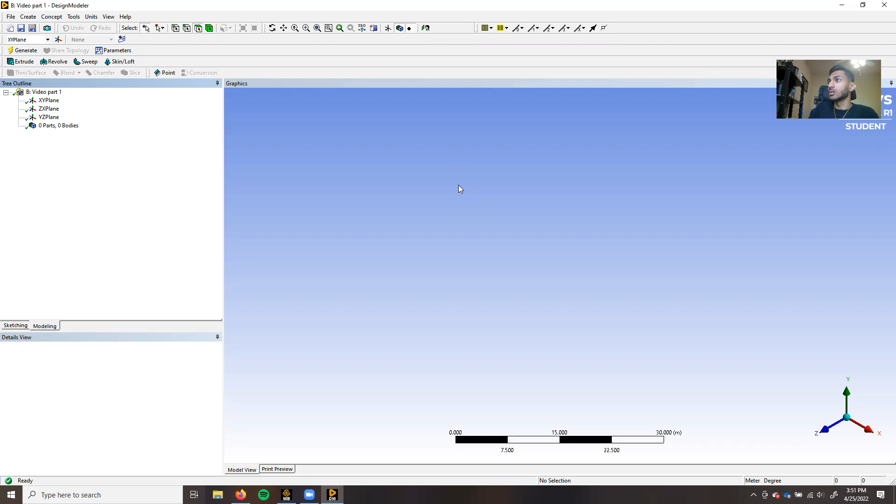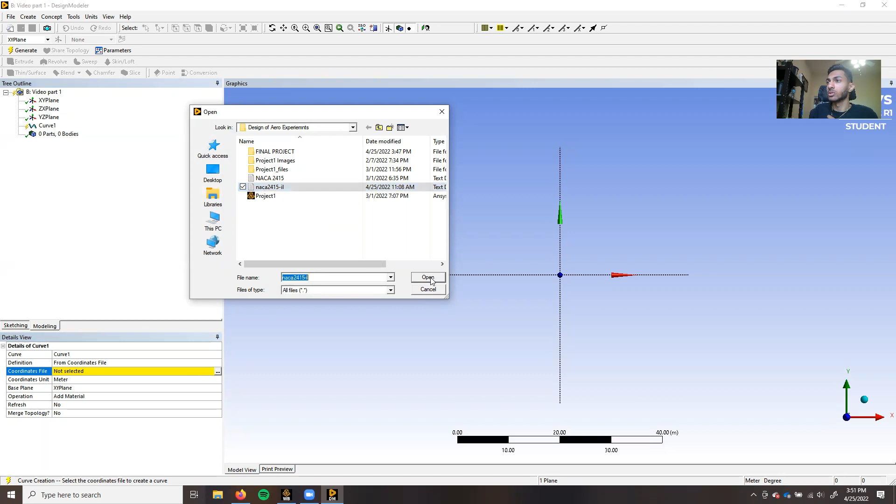Once DesignModeler is open, I'm going to just turn my view like that. Go to Concept, Curve, and then Curve from Coordinate File, and then select the coordinate file. I already have the coordinate file downloaded for the NACA 2415. It's going to be formatted in a certain way, and I've already gone ahead and done that from when I downloaded it. So if I press open, it imports it just like that. And I'll go and generate that so it's there.

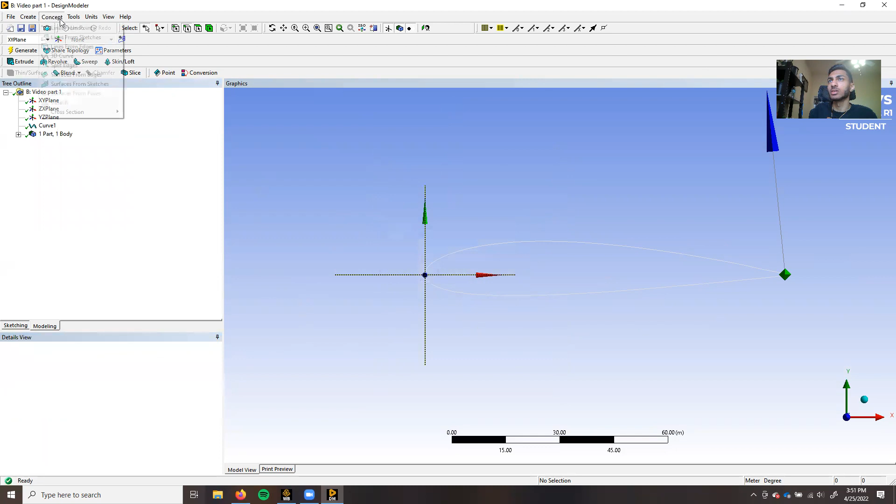Then I'll go to Lines from Edges, and select that edge, apply, and then generate that. So we have lines created. Then we need Surfaces from Edges. This edge, apply, and then we go and generate that. It turns into a surface. So that's how we're going to start there.

Now what I'm going to do is go to the XY plane and create a new sketch. Go into Sketching, Arc by 3 Points, create the arc for this. There. Then modify dimensions, just to make sure this arc is lined up with the origin like that.

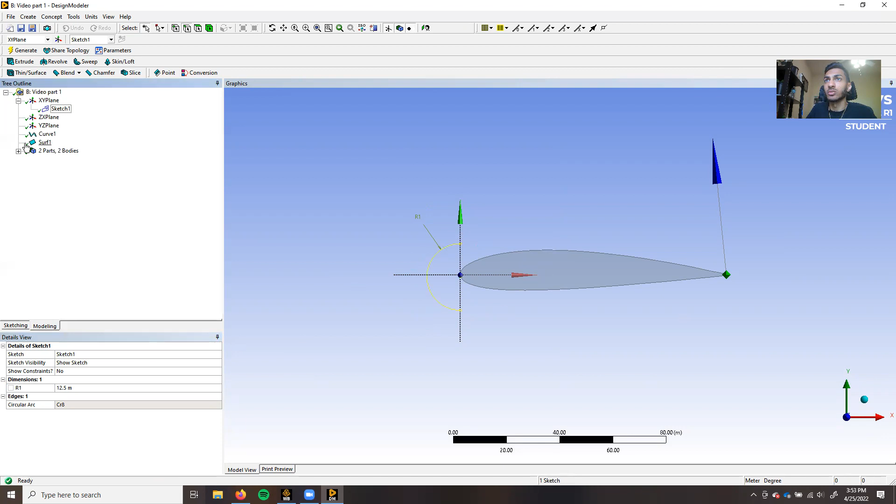And we'll do another one. So draw and, no. Go to General and look at this. We're gonna want this at 4.5. And you'll notice this is actually just not the right size. So to fix that, we'll go back to model and we're going to order this curve here and we can just put meter to centimeter. Again. We want it to be pretty small inside of our enclosure.

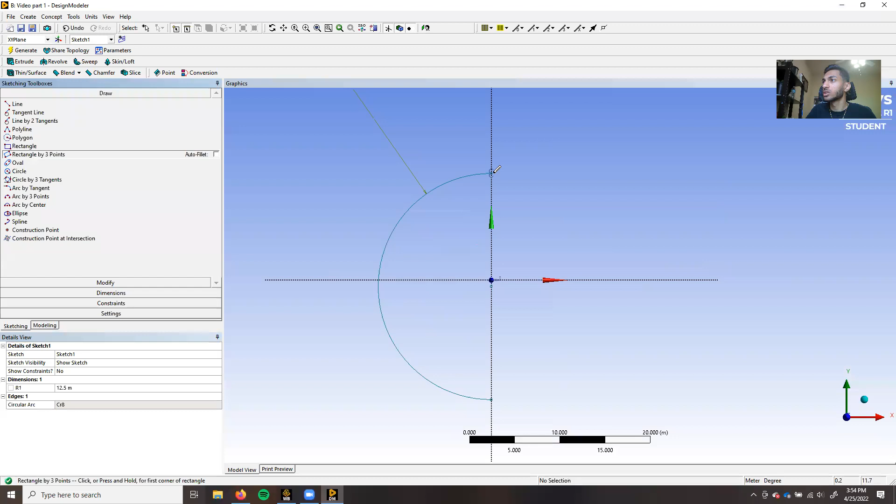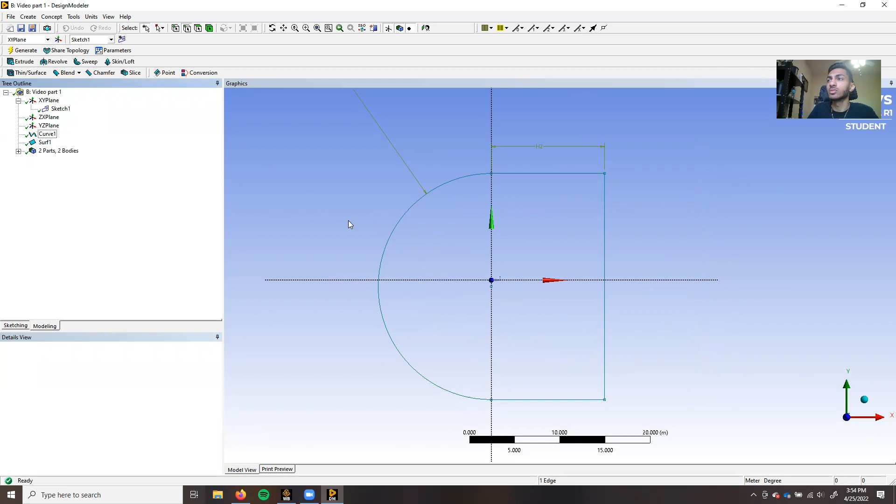Next, we're going to do Rectangle by 3 Points. We're going to make sure we're still working with one rectangle by 3 points. Like that. Dimension, General dimension. And then let's make sure that this is also set. This will be kind of our wind tunnel. It's not actually a wind tunnel, it's just a box. That looks good. Our last step is going to be just to erase this middle line right here. So that looks good. What we're going to do now is bring this sketch. Good.

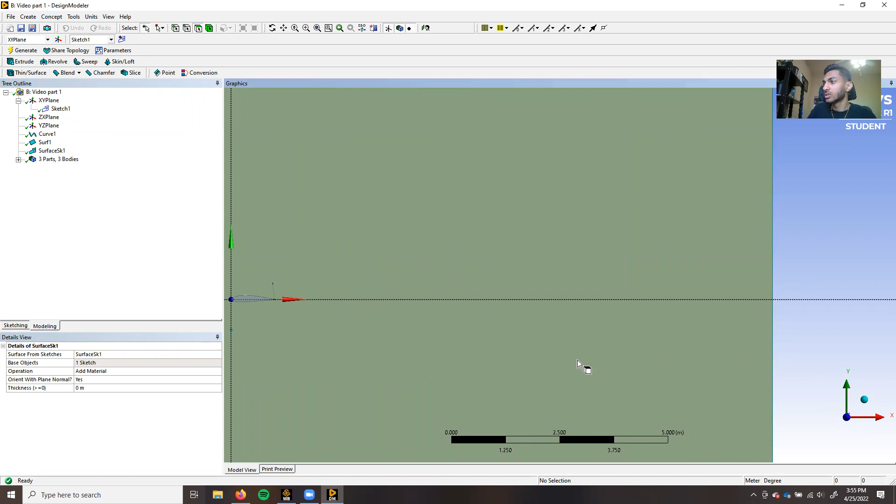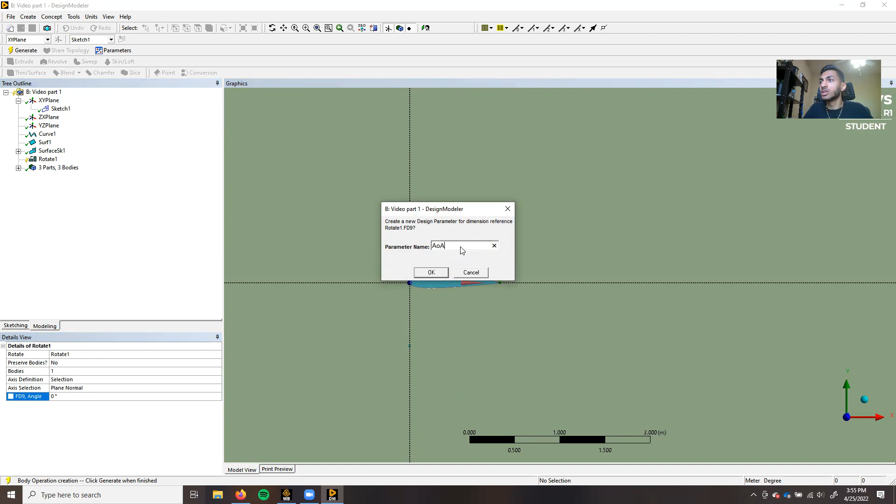And now we just want to cut out this middle part, so let's zoom in so you can see it. I think actually here's a good point to do some transformation. What I'll do is Create, Body Transformation, Rotate. The body we want for this is the surface. Want plane normal. Zero for now, but we do want to do a parameter. The parameter will make it easy to do the calculation at different angles. If I want to do this, the whole part. And we'll do that.

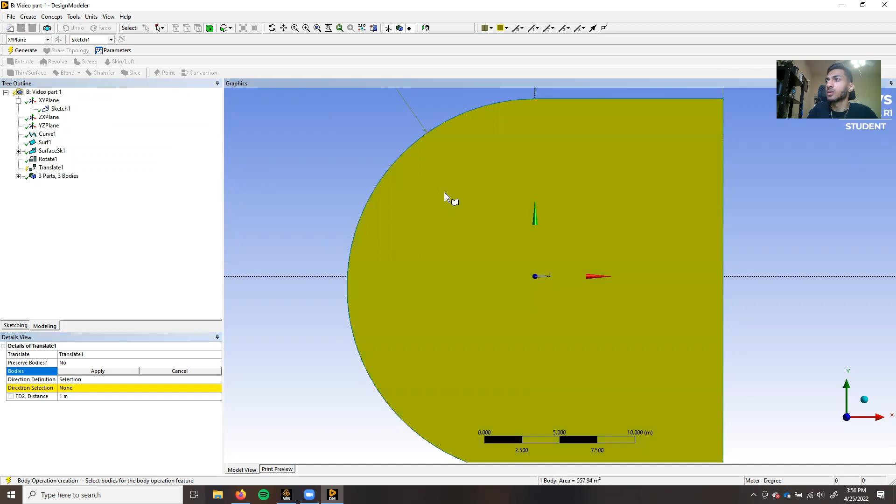We'll go back to Create, Body Transformation. First generate the body transformation. Translate the body in this axis direction. And then we want to move it back one. So that looks great. Again. Back mark. Which is what we want.

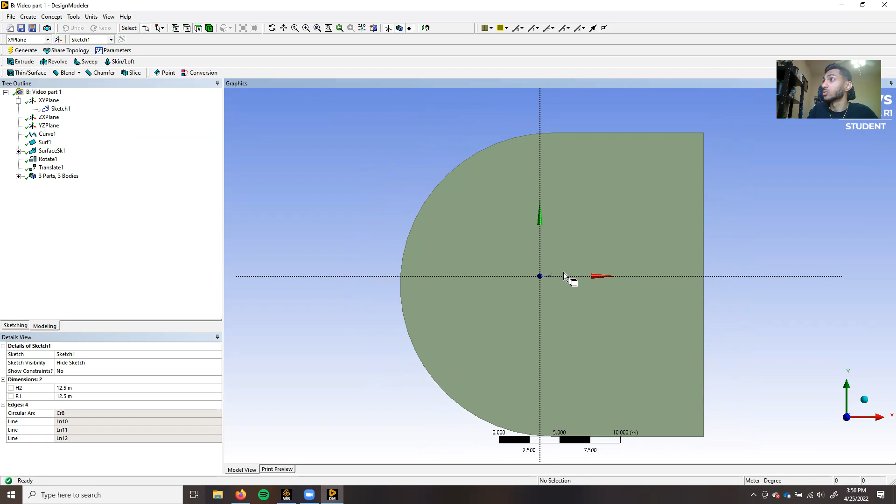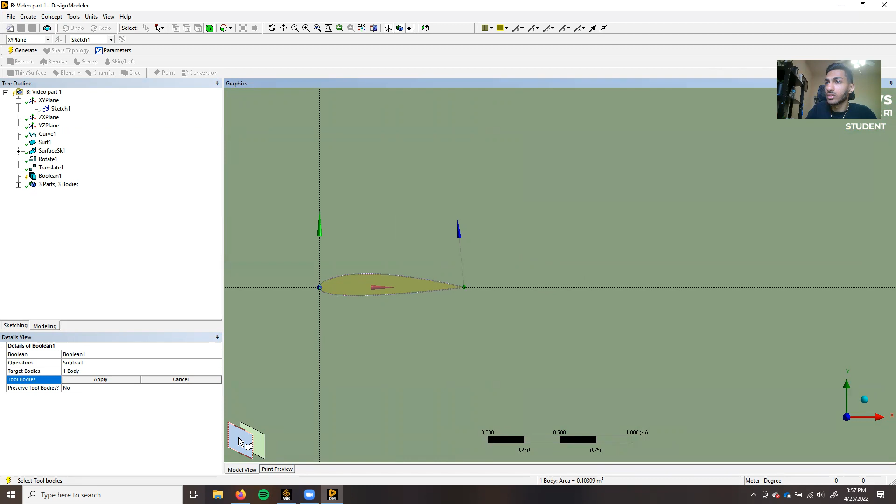All right, so the next thing to do is to take the cutout; we need Boolean. Right, perfect. Target body is this big one, fine. Tool body is going to be the wing, selected by using this in the corner, whatever. Geometry setup, we're good to go. We're going to close this. And using the parameter, marked off by default. I'm going to leave that how it is for now.

Now we're going to go here to mesh. We're going to start editing the mesh. So we'll edit, and we're going to let it open up for us here.

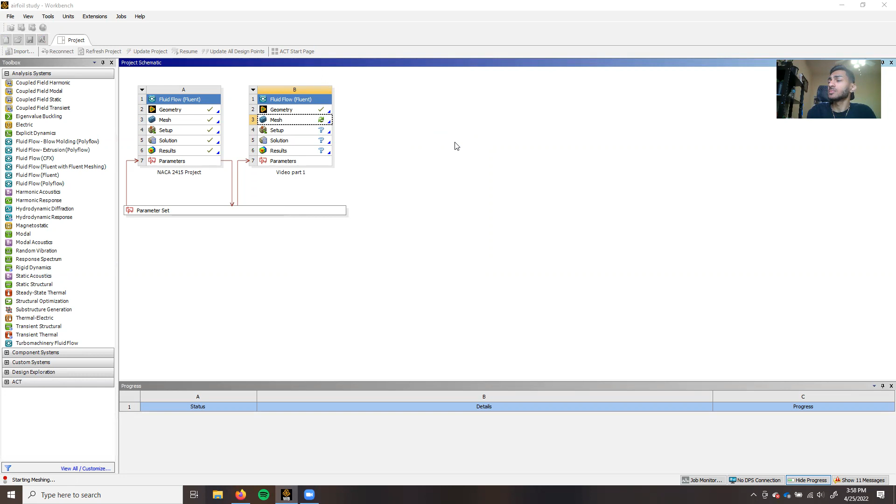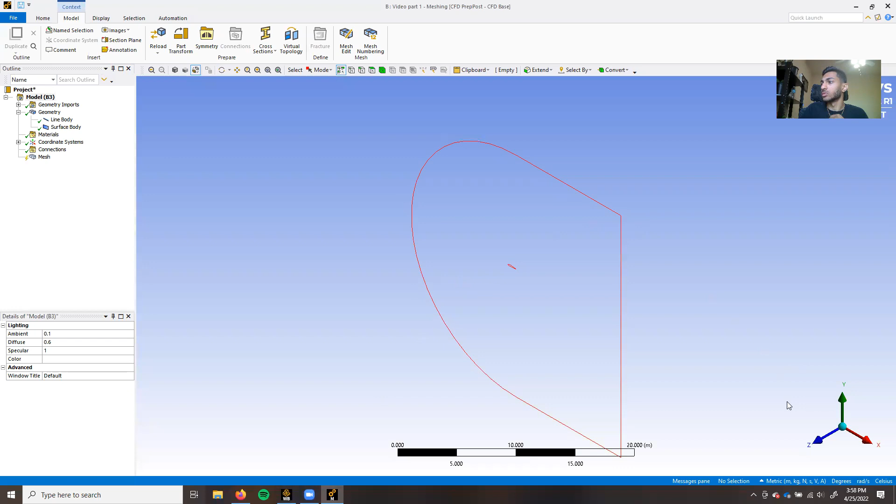Actually, side like this. Go to mesh, insert method, geometry. This one, all triangles. That looks good. Go back here to mesh, insert, go sizing, and for type, we're gonna go

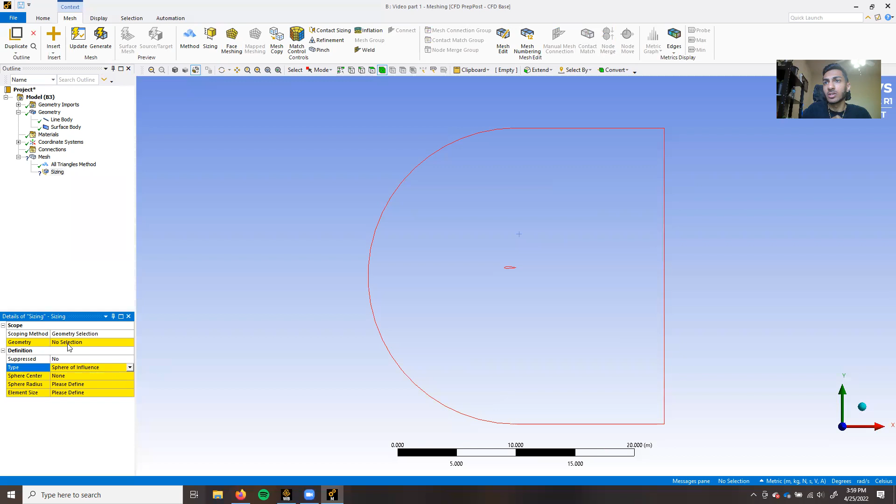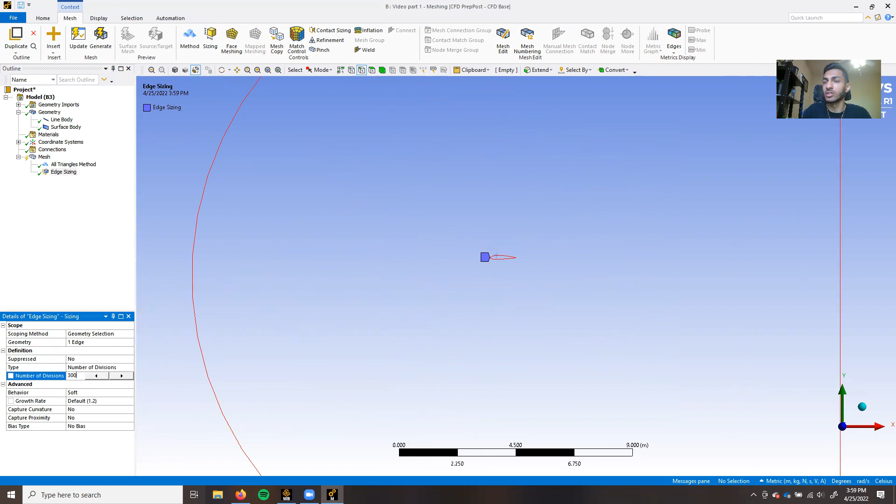divisions and number of divisions. The geometry I want, this edge, select that edge here. All of these edges. Edge. Divisions. I want 300 divisions of bias. Bias here. I'll put a bias factor of 150.

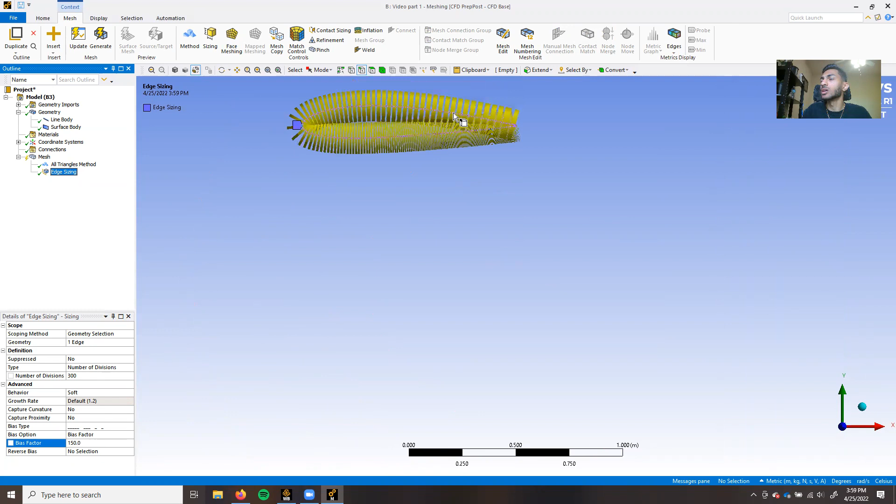This is a lot. Basically makes it so that there's more meshes along surfaces. Insert finally. Now we're here. Looks good for me, so we'll go to mesh and we're gonna

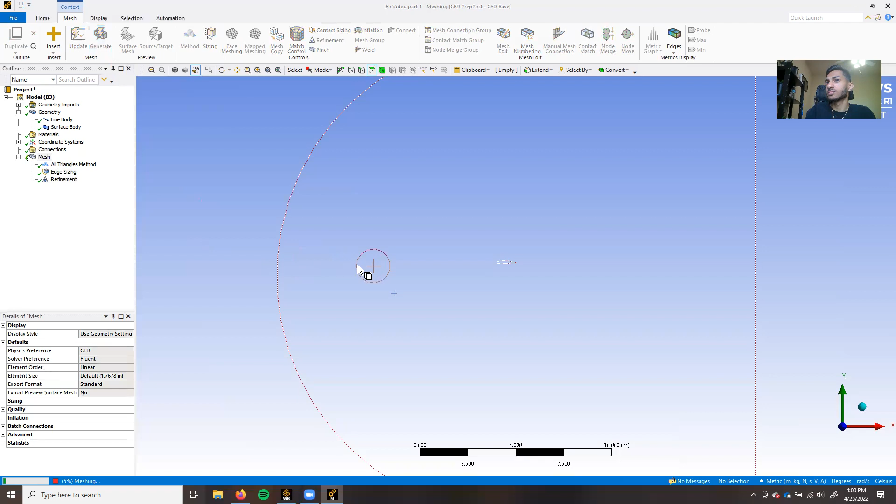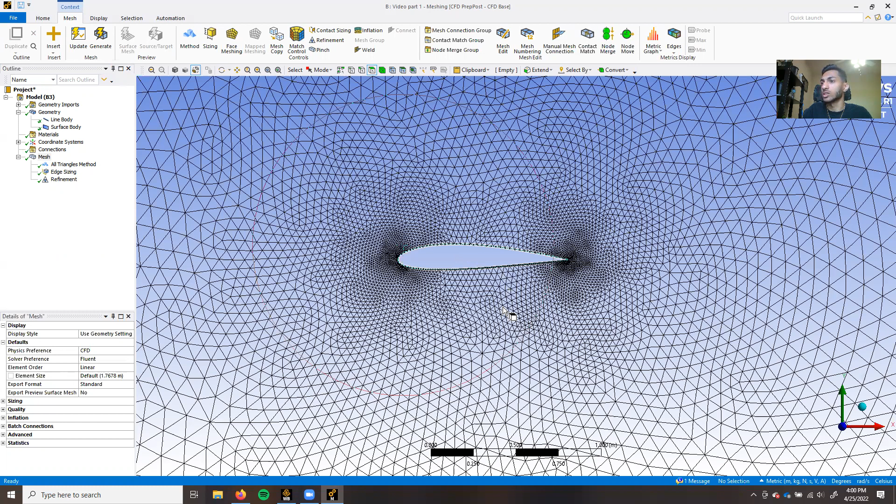Now we'll go to our setup. Double precision, we'll use all this. We'll see the process by which we're calculating everything. Okay, here for us. And let's go over the setup real quickly.

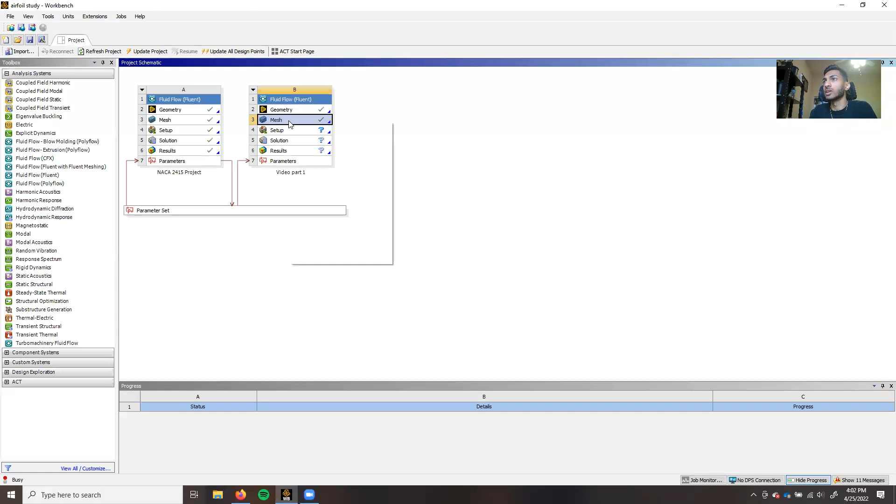Okay, there's something we actually did forget to do, and we'll have to go back to the mesh. I'm going to close out of this. And what we forgot to do was label our named selections. We'll go back here and we'll mesh. We'll do that.

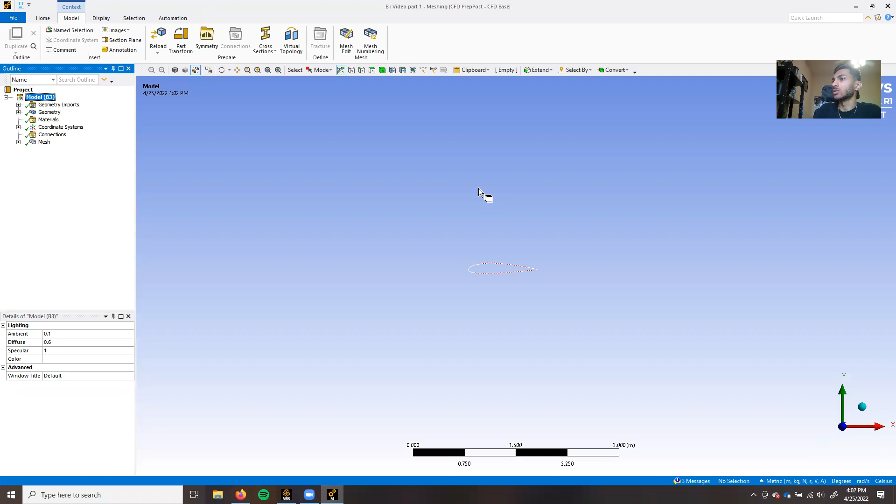Here is the right edge selection. We can select everything. So we go on edge. Click on the button. You can create a named selection for it. This is going to be our inlet. We'll have here. One is your outlet.

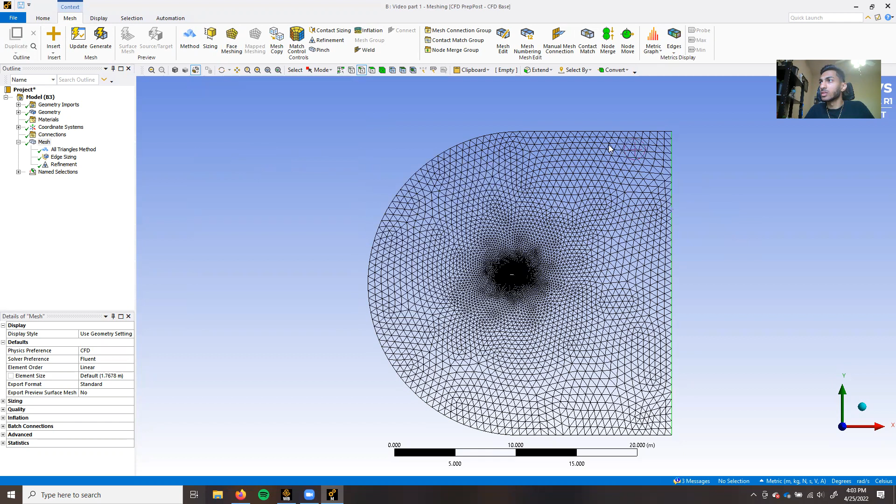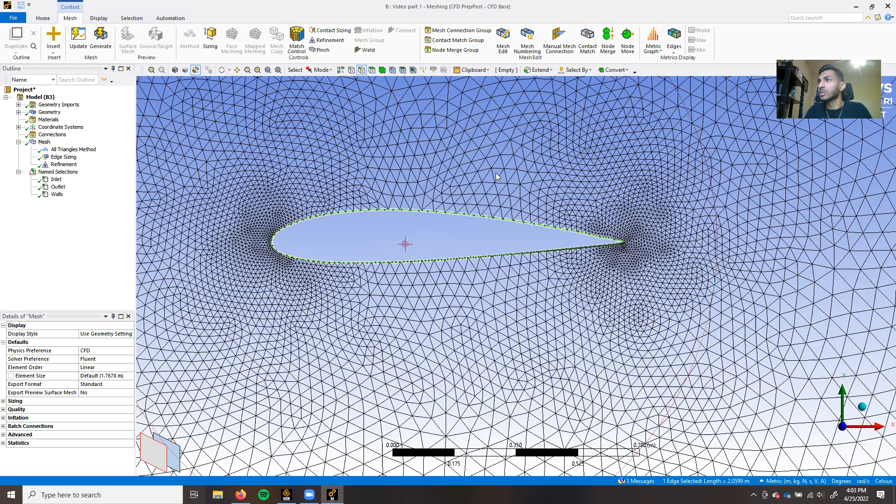And we have this up here and this down here. This thing will be our walls. And then finally, put on your the airfoil and like this. Here. Now that that's done, we can update. Maybe this little message here. Transition successful.

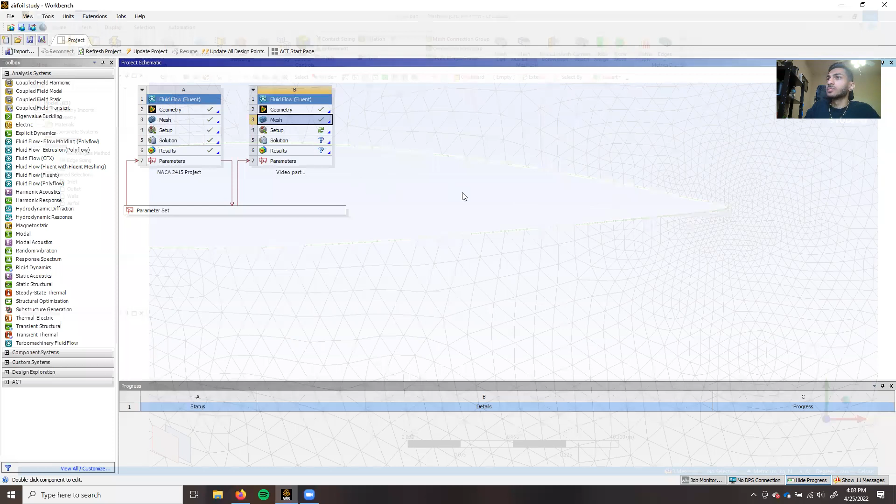Yeah, the next thing we want to do is load the new mesh because the new mesh is what contains all my selections. So everything looks fine in here and press start. Now, hopefully, if we did this right, everything in the setup will actually already be kind of ready to go based on the selections that we created. And this makes it easier for us to set our boundary conditions. Let it load in and we'll take a look.

Zones, that's pretty good. All right, so let's take a look at our boundary conditions now. We have inlet. Look at our inlet here. Open up inlet. And so what I want to do here is set the magnitude to 15. Because that's what the problem says.

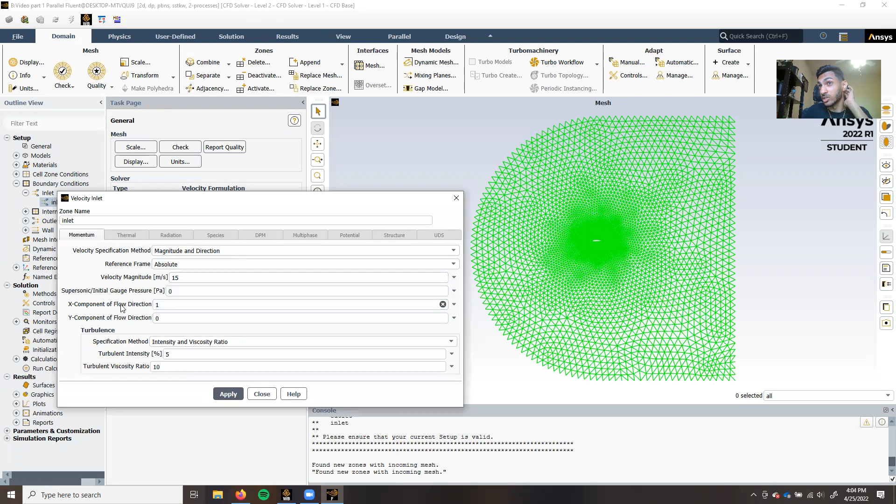And then for normal to boundary, we're going to want it all going in the x direction. So we'll go back into the direction. And just choose the x direction. Like that there. Now we can go to, okay, that looks fine. So what we're going to want to do next is make sure our model here is set to whatever you want it to.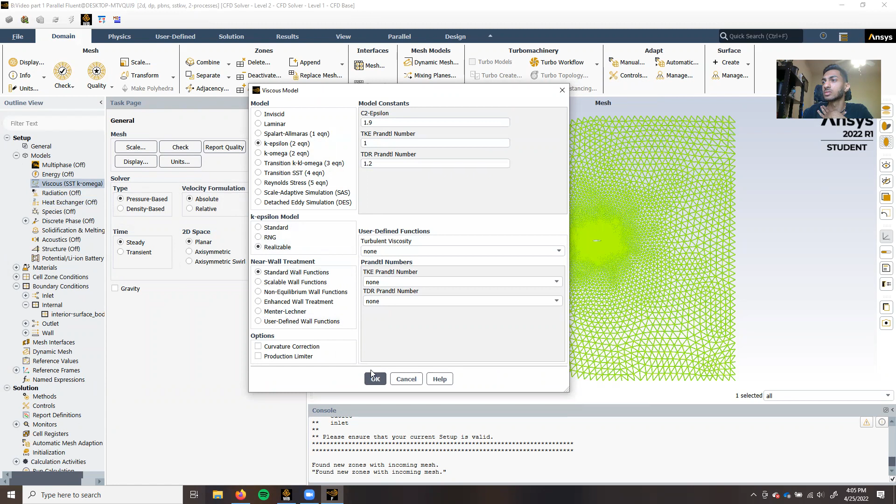We're using viscous, and we're going to use k-epsilon, realizable, and the same. Now, that was based on the tutorial that I want. Then materials, we want fluid, we want air, and just note down the density. Obviously, the density is known, so we'll leave that the same.

Everything here looks fine. Looks fine. Looks good. Looks good. So we'll go down here to initialization now. Standard initialization, computing from the inlet out that way. Everything here is the same. Initial values, everything looks good. Then we can initialize. That's good.

We can go to run calculation now. And we'll set our number of iterations to 100. You can go more or less depending on the computing power of your processor, excuse me, and then we'll go ahead and calculate this and see what we get.

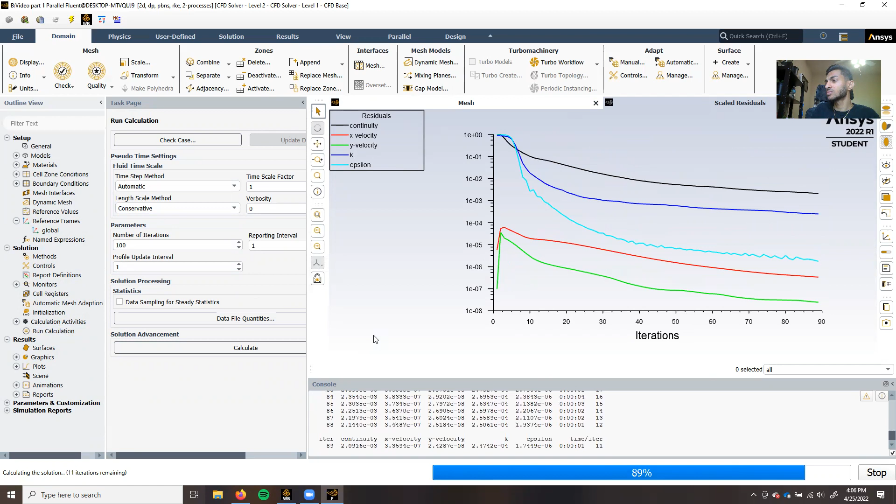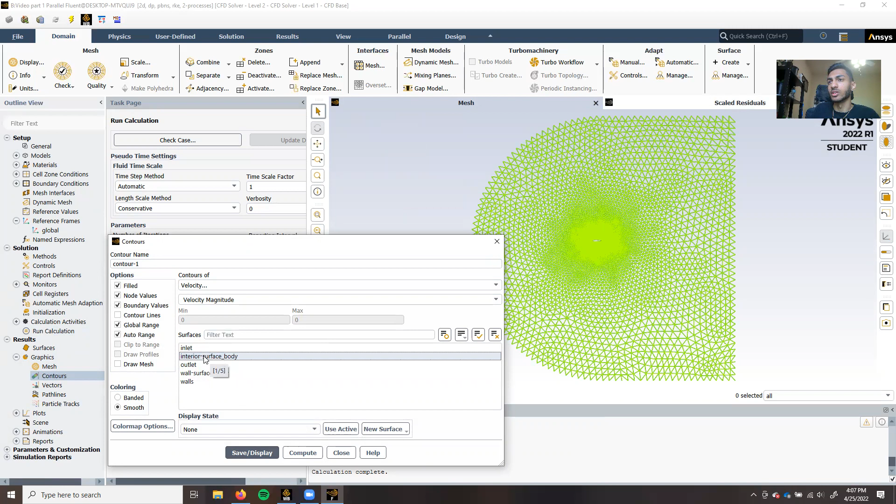Let's take a look at the graphics. We already get some velocity contours. So we'll get velocity contour of interior body surface. Looks good. And we'll get the wall surface body as well. That's the airfoil. And we'll compute and save and display. We'll see what it looks like.

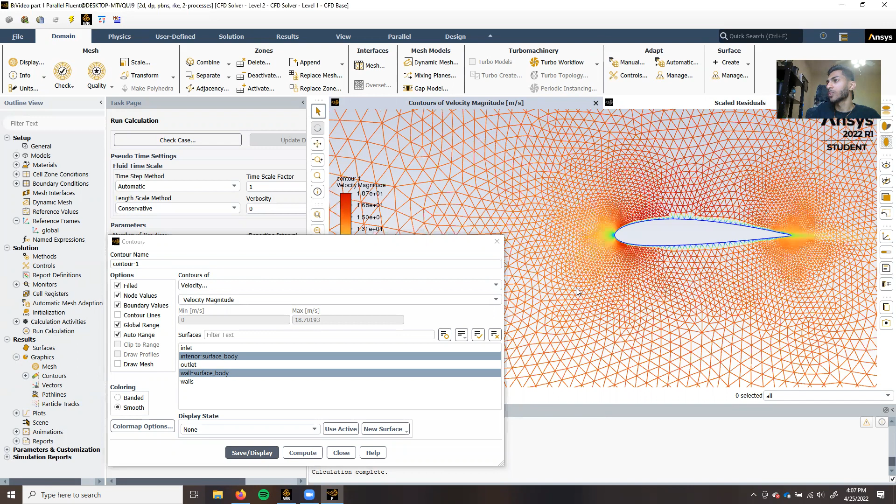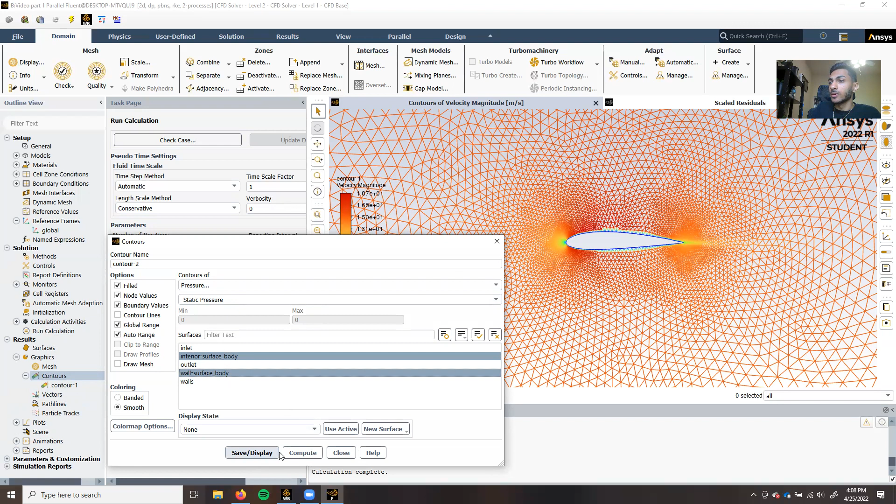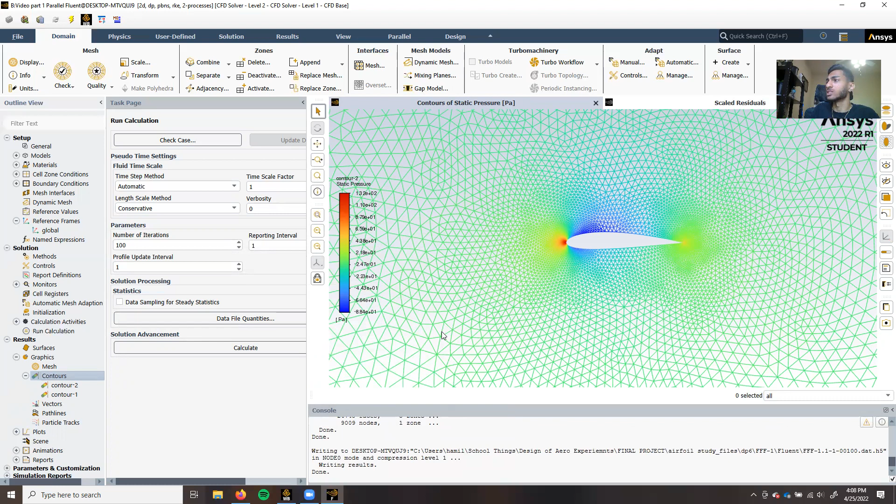Next, what you would do now to get the different angles is you could go back to the geometry design modeler and just change that parameter. But the faster way of doing that is what I'll show you now. You can save all that stuff so that it can run those calculations every time, exactly the way that we set it up.

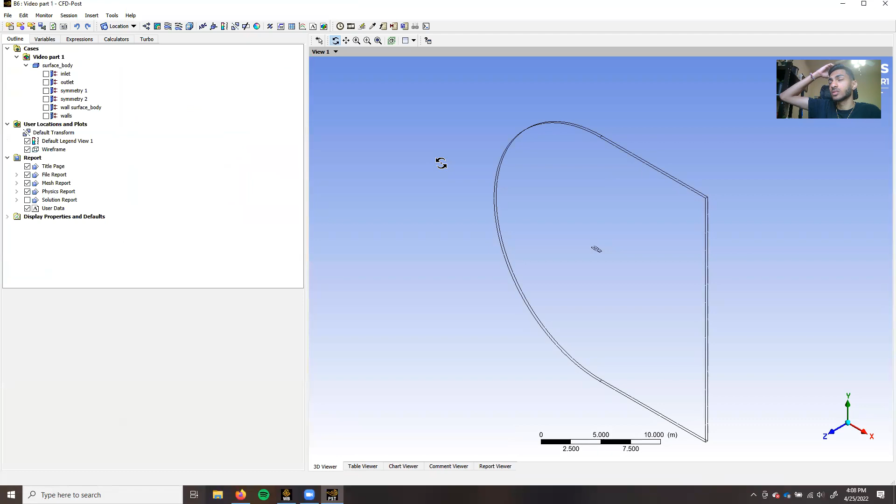So now the way you would get it to provide the information that you want as far as coefficient of lift and coefficient of drag, you're going to go to the post expression, and it's actually possible for us here to create a new expression. We'll call it CL, and then you can use the things up here to create a new CL.

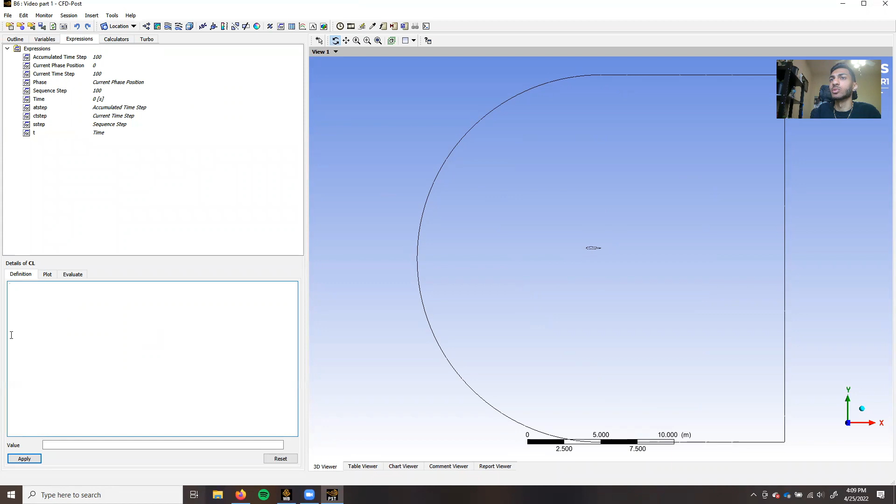So what you do here is you would insert the formula for CL based on things like the force across the x and the force across the y, and you could use that. I put the calculation to find coefficient of lift. You could put the formula through output. But where's that output? So that's what I'll show you next. Where does that output go?